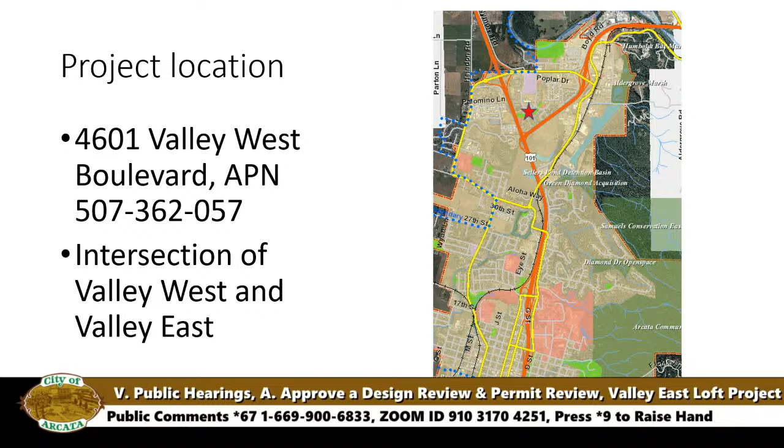Here's another visual of where the site is within the core area of Valley West, and a zoomed-in view of the site itself. It's predominantly surrounded by urban development and is one of the few remaining large-scale sites in Valley West to develop, making it a key opportunity site in the neighborhood.

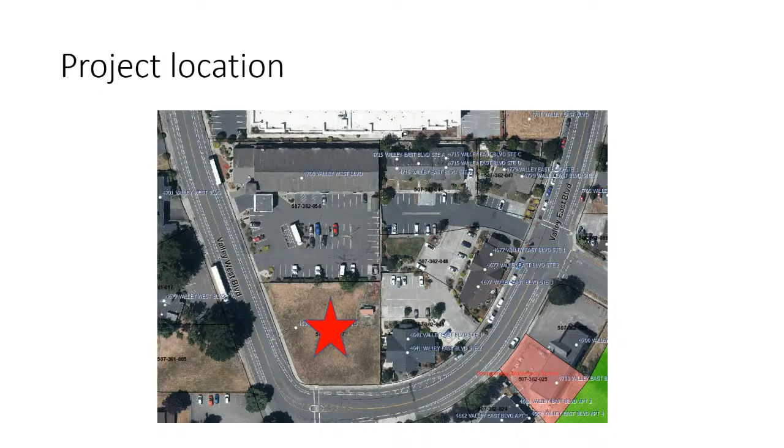This is what it looks like based on street view imagery. We have the Comfort Inn and Suites directly to the north, and the Valley East Center development to the east, which includes medical developments as well as existing multifamily in the northeast portion of the site.

A little site history, included in your packet, that Joe and David can speak to further if you have questions: the majority of lands south of the Valley West Shopping Center were included in a PD that was never ultimately developed, and sites have been developed piecemeal in the interim years. The request tonight from the applicant is to integrate this remaining parcel into the Valley East Center development.

That development, when approved by the Planning Commission in 2002, created additional flexibility for residential uses on the site, and ongoing permissions for the addition of residential within the development in any configuration acceptable to the Design Review Commission—a duty the Planning Commission has now taken on.

Summary of the project: it's a 22-unit development, three stories, with the third floor primarily loft units. There's one parking space provided per unit, meeting our minimum standard, and currently they're proposing 17 covered bike parking spaces, which is over the 50% requirement.

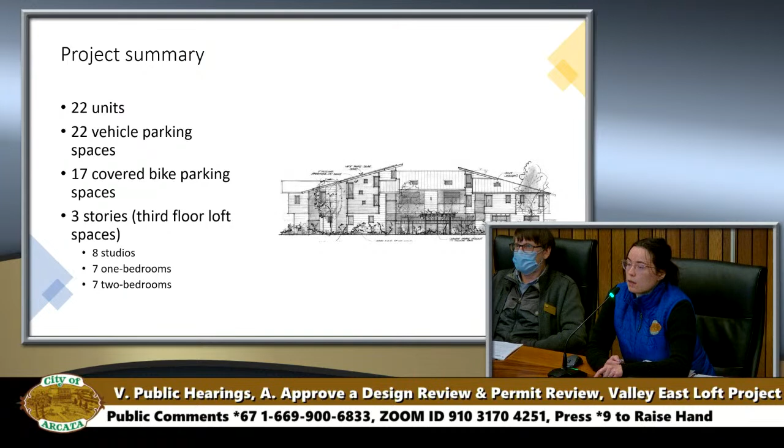So I'll run through the elevations quickly. This is the southern elevation, showing the proposed shared open space.

The east elevation faces the highway at the bottom. The west elevation faces Valley West Boulevard, and some bottom floor units have private fenced open space. This view shows the parking lot in the foreground with garage units in the rear of the parcel. Then the north elevation, facing the hotel, is shown at the bottom.

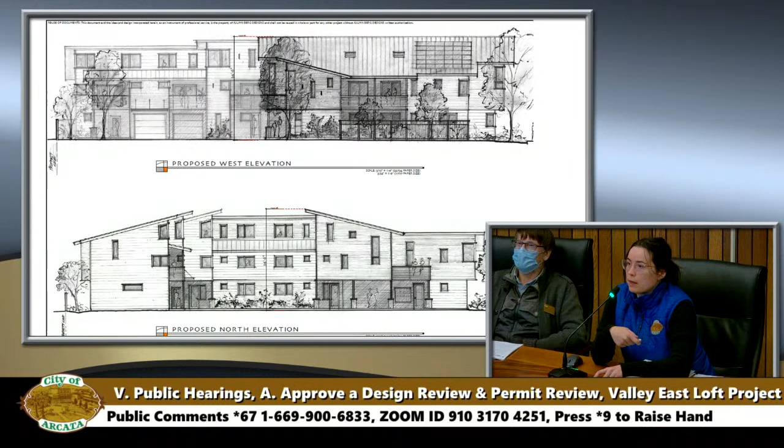We're supporting design review findings for this project, which find strong aesthetic compatibility and generally a very attractive site design and layout. Those findings are outlined in your packet.

We also wanted to highlight some requested modifications to typical standards for multifamily projects, including private open space, shared open space, and storage spaces. It's important to note every unit is provided private open space, but it's typically under the requirement of 150 square feet minimum per unit.

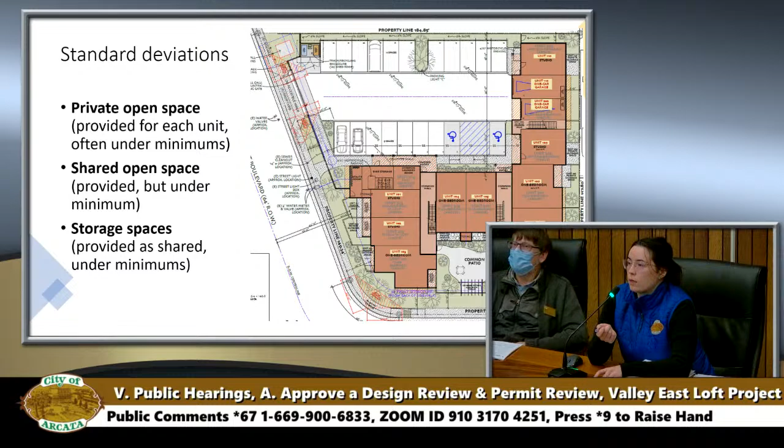Particularly the second and third floor units are provided terraces of about 50 square feet instead of 150. The shared open space is a well-designed, attractive common patio with south-facing exposure, but it's under the minimum of 1,000 square feet, coming in at about 650 square feet. Shared storage spaces are provided on the ground floor by the utility room and bike parking, and also along the common patio.

But again, they are falling short of the minimum of 100 cubic feet per unit, which the code typically requires. So the draft findings for the PD essentially make the argument that the requested deviations from the standards allow for the project to be designed to a high aesthetic quality and provide a dense number of units, which is a need for the city and for the neighborhood as well.

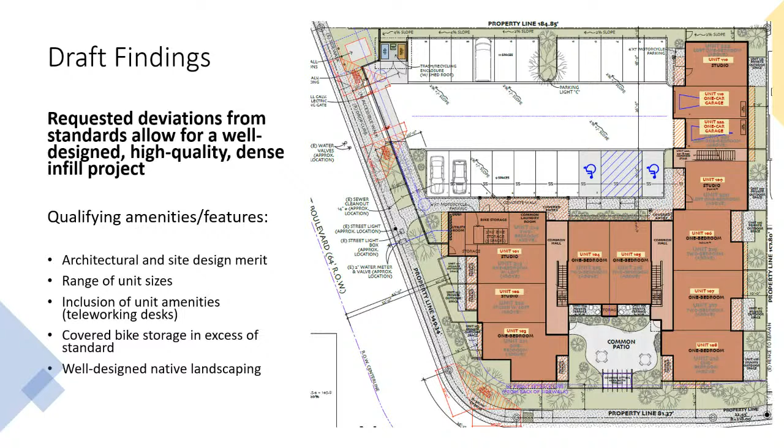This is due to the qualifying amenities which the development offers, including the architectural and design merit, which I mentioned, as well as the range of unit sizes, the inclusion of amenities in the units like desks for teleworking spaces, covered bike parking in excess of our standard, and also well-designed landscaping in excess of our standard, which includes a well thought out suite of both native plants and drought-tolerant plants.

The project also qualifies for a Class 32 exemption for infill projects. We can make this finding based on the consistencies that we need to make. It's consistent with our general plan and the intent of our principles for the zone. It is within city limits. It's a small, about half-acre site, substantially surrounded by other urban uses. There is no habitat value on site, and it is served by public utilities, and we are not anticipating any significant impact to air or water quality, traffic, or noise as a result of moving this project forward.

So we would like to suggest the Planning Commission approve the project and make the recommendation to adopt a Class 32 CEQA exemption and the action in your staff report with our draft findings, conditions of approval, and the site plan. And I'm happy to answer any questions. I know the applicant and agent are in the audience and can also come up to the mic and speak to their project as well. So with that, I'll turn it over to the chair.

Okay, so before we hear from the applicant or their agent and the public, does any member of the commission have any quick questions? Dan, Dave? Yeah, briefly, shared storage space, can you explain what that is in this setting and what code would otherwise require? I'm a little unclear. Yeah, I'm happy to take a whack at that, and then I'll probably turn it over to Joe or David to further clarify.

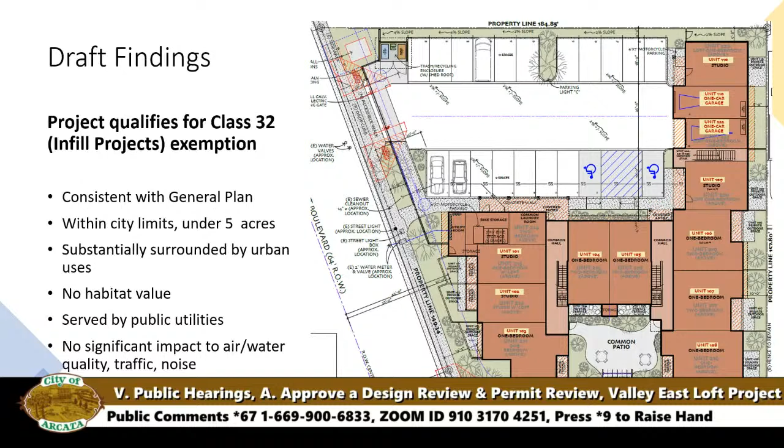There's the common bike storage right here. Do you have the floor plans in front of you? You can kind of see the size of that space. It's mainly for bikes, and there's a motorcycle space in there, so if you had a kayak or whatnot, it wouldn't really work in there. And then 2 of the units have a garage, so there's additional storage there, but we have not provided an individual locker for each unit.

Where's the on-site manager going to be? The on-site manager is the unit up in the corner, and that person would have the garage, so you could store ladders and maintenance things right in there. Let's see, it's unit 110 up in the northeast corner.

Yeah, the landscape plan was done by Genevieve Schmidt. She owns North Coast Gardening, and she's really excellent. I've worked with her on a lot of jobs now, and she used to write for a nationally published magazine, so she's pretty smart and well educated when it comes to planting. So I really trust her.

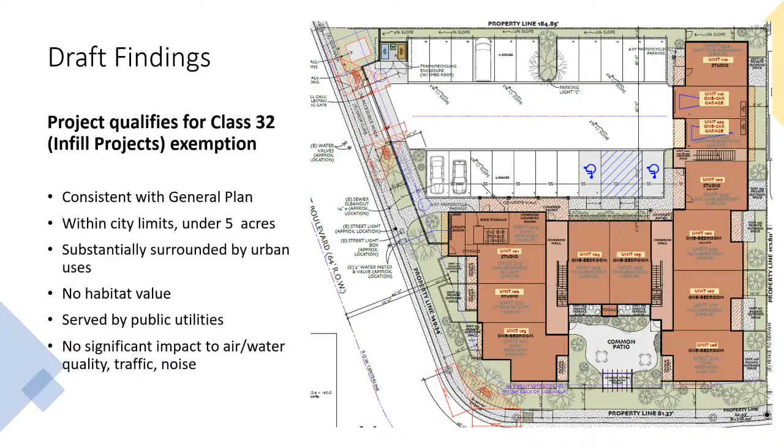Okay, do we need more discussion, or do you want to make a motion to approve? One more question, go ahead. Yeah, as long as we're asking questions and with design significance, that question about covered parking, potentially with PV panels on top, or electric vehicle charging potential, is that something that is part of the project, or that could be?

Dila, do you have the roof plan? You probably don't have it as part of the package, right? I have a separate plan sheet for that. There is a roof plan that shows the buildings with the PV panels on one of the buildings, but not the other, and it doesn't say anything about the parking. Right now, we're not planning solar PV over the parking. I think that would be quite costly, and we have a lot of roof area on this that's available for solar, so it's going to work out well for that.

So in other words, if you were going to increase solar, it would be more cost effective to just add more to the roof system rather than create a separate structure. Oh, absolutely. I designed shed roofs on this, so you have a tremendous area. If you see there, that's a pretty big solar array, and that's only a small portion of the whole roof line. Great, they could certainly add on in the future. Thank you.

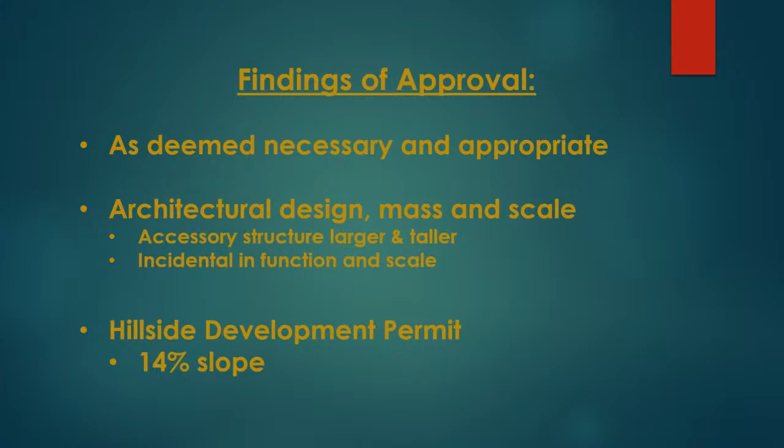Included in the action is the hillside development permit. At one point, we were contemplating, is the hillside development permit really required? According to the site plan and some of the topographical information that we have, it has an overall 14% slope. It is not really what we might consider a forested hillside area, but it is within that mapped area that the general plan adopted. So it does require us to make that finding on this to require a hillside development permit on it.

Again, the recommended conditions of approval, you can amend those as you see fit to support the findings of approval. One of the conditions of approval that staff is suggesting is to provide on-site maneuvering area for the recreation vehicle. One of the primary purposes of the accessory structure is the desire for the property owner to have indoor storage for the recreation vehicle. That does kind of dictate the size and dimensions of the accessory structure in some ways.

But we felt that the maneuvering area on site didn't really allow the vehicles that enter and exit the property to enter Bayside Road without backing out onto Bayside Road. So that's a key thing that we wanted to do. We spoke with the city engineering department, the agent, and the applicant on this, and we believe that there are provisions that can support on-site maneuverability and still maintain the allowable site coverage standard.

Here's our site plan here. Bayside Road is along here. The 1,200 square foot manufactured home is here. It's about 23 feet from the roadway, and then another 30 feet back would be this accessory structure here. We have the driveway entrance here, 2 parking spaces for the dwelling unit, and then another driveway along here. The RV would park right there.

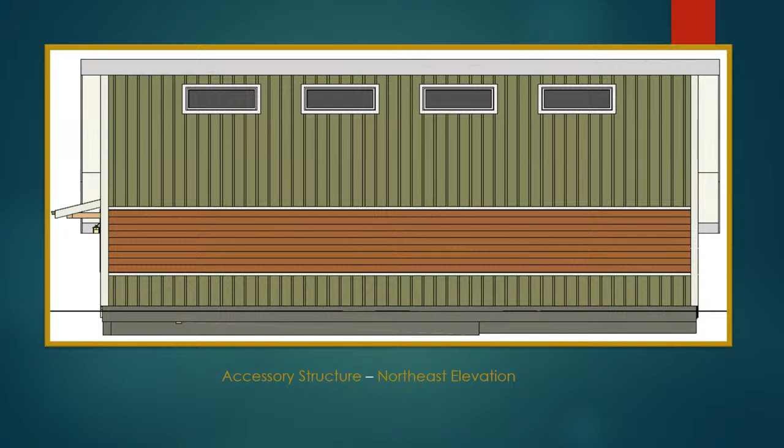Here's an elevation of the accessory structure. My understanding is that the 2 units or the 2 structures will be painted in similar and compatible colors. This is about 21 feet, just over 21 feet in height.

This would be at a slight angle. If we go back to the site plan, you can see what we're looking at is here, so the vehicle would pull in. The highest point of the structure is in this area. Of course, that is driven by the size of the vehicle here. It's a sloped roof, a shed roof, going up from about 8 feet to 21 feet in height here.

We do have windows up in the north, and then of course this nice architectural feature to break up the largest mass on this wall here, on this wall plane. Overhead weather protection on one of the doors, the person doors there.

This is the opposite side. And what is unique about this structure is that it includes the RV parking. There's other shop space and storage areas. There's a full bathroom, hot tub areas in this area. And then there is a greenhouse with earthen floors in here. So this one structure has multiple uses in it.

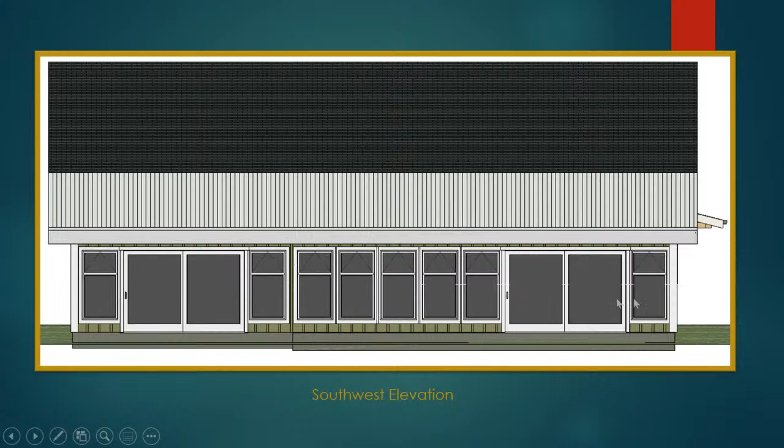So it does have asphalt comp roof shingles here. And then this is clear polycarbonate sunroof material here. A lot of windows, a lot of different style windows, awnings, French doors here open up. And then we have the garage door here.

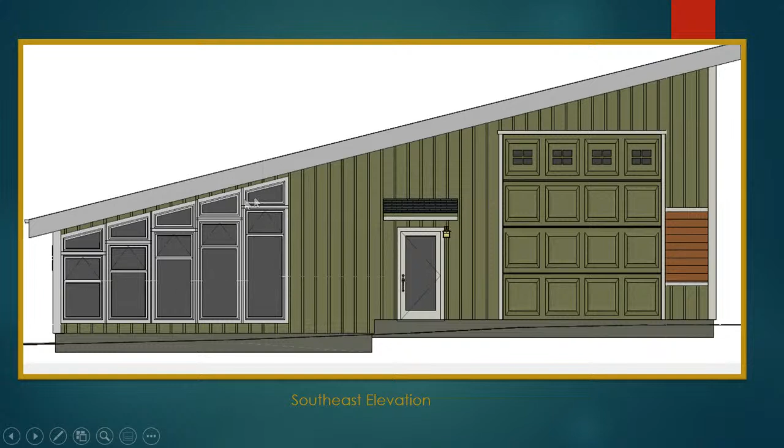They are looking at a different design for the garage door, more custom. It has a different pattern that starts out with a higher density at top and then gets to a lower density here. So they are looking at a custom door for this garage door. And then again, these size windows here are different shapes and styles of windows, again to create additional glazing for the greenhouse. And then this side would be the opposite of that.

Here would be the entrance to the hot tub, and then here's the shop space itself. I don't have a floor plan with this PowerPoint presentation, but it is included in your packet. You can see the different uses there.

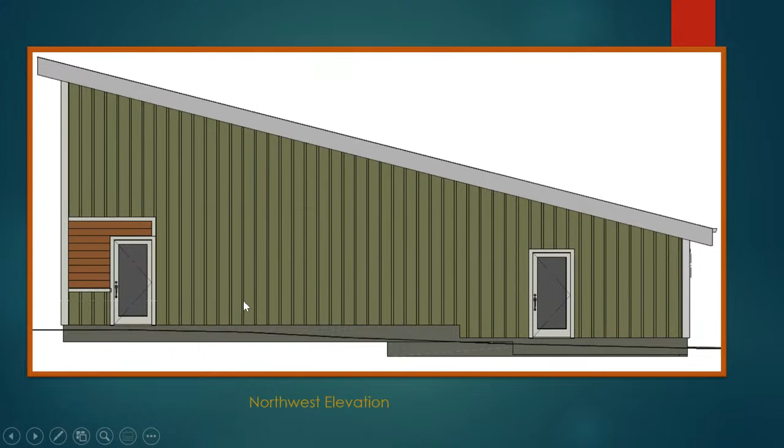That is basically it. We do have a, oops, there's one slide missing. Go back to the recommendation.

The recommendation is to consider the project, and the key question is, can you find the accessory structure incidental in size and function to the purpose of the property? It's a large lot, over 30,000 square feet. It does slope off a little bit from Bayside Road down.

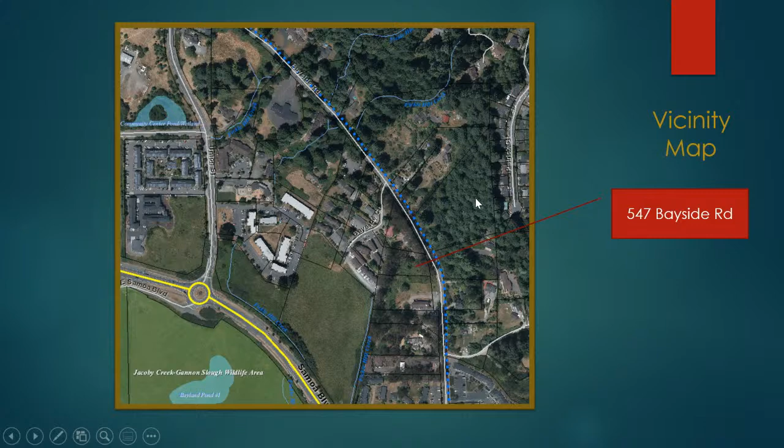definitely a forested hillside and steep slopes. I do have a quick topography showing here. It's just unfortunate that you don't see a lot of it with this, but it's very tight density with contour lines, 1 foot contours. And this is the subject property where it's much different than, here's just line after line right there, but there's quite a bit of space. You get a lot of run for that.

Anyway, I would be happy to answer any questions for the Planning Commission. I know that the property owner is present, and I think the agent might be trying to be on Zoom as well to answer any questions, but I would be happy to answer any questions if I can. Pass it over to the chair.

Thank you. If I could just add one thing to the discussion. Joe did mention this, but I wanted to bring it home for the Planning Commission before you enter your deliberations, that this is real similar to a project that you did about a year ago, where the accessory structure was actually larger than the primary use on the site, and you found that one compatible largely around findings that it maintained the use, that it could convert the use in the future, and that visually the use appeared similar. So you have a precedent of making these kinds of decisions before, and staff is bringing to you a question as opposed to a very well thought out set of findings.

I'd also add that there's nothing in our application checklist that would require that. I do think that's something you're going to have to use your imagination for, to get a sense of how this project would look from the street. It would considerably increase the cost of the application process for them to hire a consultant to prepare those kinds of drawings for something speculative that they're not sure is going to get built.

Right, but in terms of what we need to do in design review, it's an essential part of being able to say whether that very large accessory structure is actually dominant or not. And I think without that, it's really going to be hard to say.

Joe, there was reference to height being the trigger for this not being a subordinate structure, and in the packet I think there was reference to square footage, and I'm wondering which is more important from the staff perspective.

The code section is under accessory structures, and both of those are in the same code section. So it's explicit that if the accessory structure is greater in height than the primary structure, then design review is required.

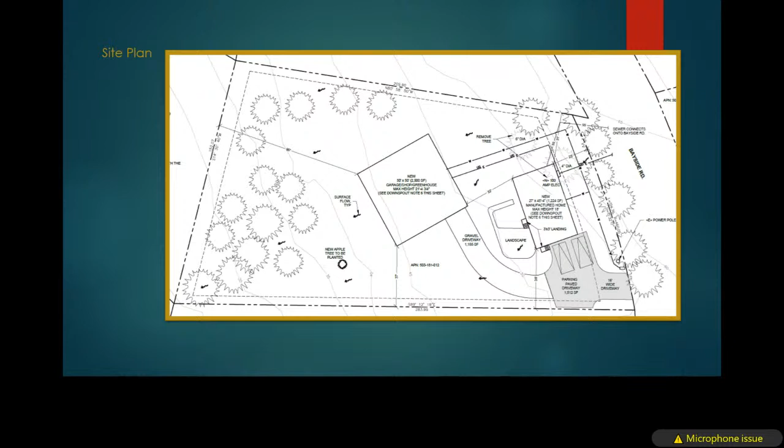I think if it qualified as true habitat restoration, we'd say yeah, that's consistent with the natural area. If the planning commission wanted to designate half of this property as natural area—not that some natural areas aren't used for these purposes—but gazebos, gardens, those kinds of things wouldn't be considered natural area. A walking path probably would be okay.

Okay, and the other area, Dan, that you mentioned—the screening from the street—I actually go by that area a couple of times a day. It's sort of on my commute, and on my walking and biking routes as well. And frankly, anything you could put there that would screen it entirely would add to the creepiness of walking along that route as a woman, where you're already not protected from the street by a curb. And if it looks good, I'd way prefer to actually be able to look into the property rather than have it creepily screened on a walking and biking route.

So that's just sort of my familiarity speaking there—I actually like to not have those properties on the bay side of that street screened, because too much vegetation there actually feels to me like a safety problem. Yeah, I can see you're going into the eucalyptus tunnel there. Essentially there's definitely a vegetative tunnel on that street at that point.